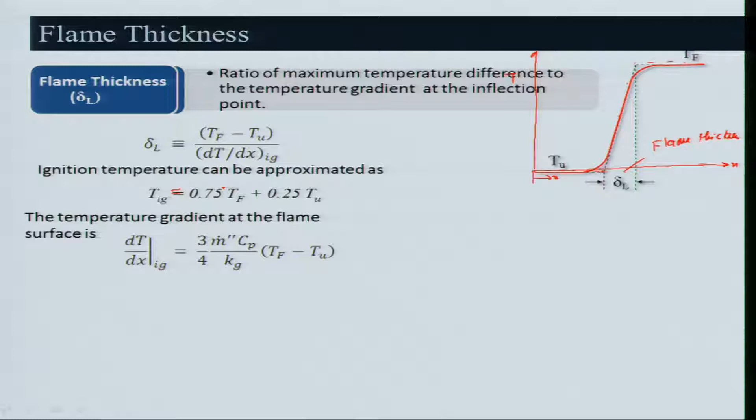The temperature gradient at the flame surface, dT by dx, we have already derived, is equal to 3 by 4, m dot double dash f, f being the bar average, Cp by kg, T_f minus T_u. And in place of T_ig, we have used this terminology.

So what we will do now is substitute over here. If I substitute, what am I getting? I am getting T_f minus T_u divided by 3 by 4, m dot triple dash f, Cp, and kg will go here, and T_f minus T_u, so this cancels out.

So what do I get then? I get delta L is equal to 4 by 3, kg divided by Cp, m dot f triple dash bar. That means this is the average reaction rate in the reaction zone we are considering. It goes on changing, but we take it because we will be using the Arrhenius equation for a global reaction, for a single step chemistry.

So therefore we can get that, and we know that m dot double dash, m dot, is basically rho u S_L. We can find out that delta L is equal to 4 by 3 alpha by S_L.

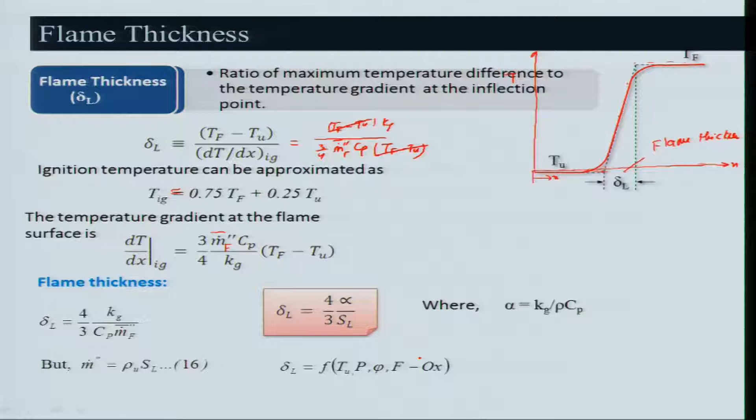That means, what do you expect here? If I say how this flame thickness will be varying with respect to equivalence ratio, I need to look at how the laminar burning velocity is varying with the equivalence ratio. You remember that the laminar burning velocity for a methane-air system or for any hydrocarbon-air system...

This is my phi, phi is basically the equivalence ratio. How will it be? If I take around 1 here, this is the lean side and this is the rich side. It will be something such that around 1.05 there will be peak values.

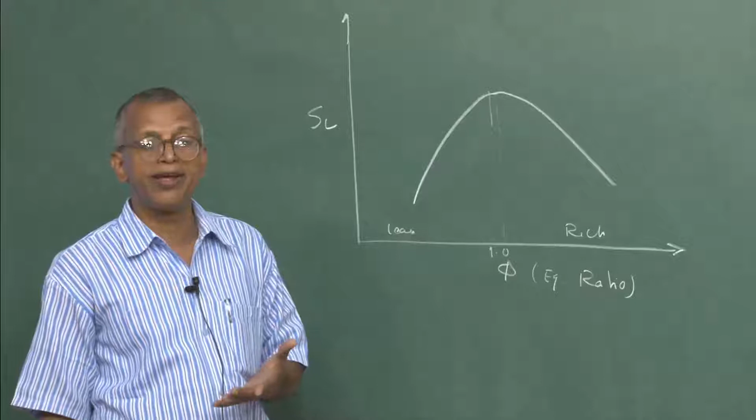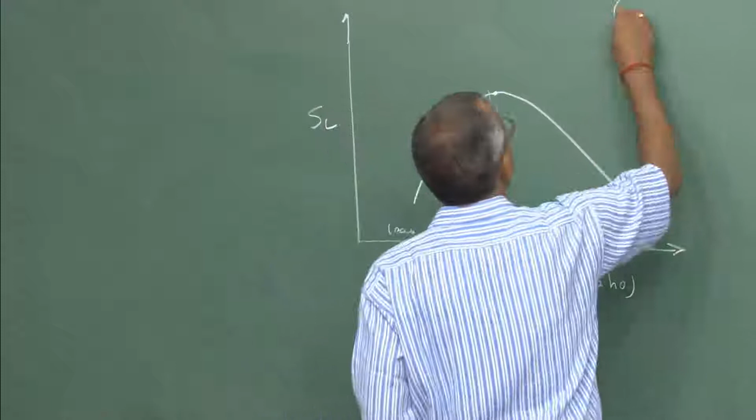Now if I want to draw how this flame thickness will be varying with respect to equivalence ratio: if you look, my burning velocity is very high here, so naturally this delta L is proportional to 1 by S_L, so I will get a minimum value, because the burning velocity is highest there.

So if I keep all the other things the same, inlet temperature and pressure, then naturally it will be roughly constant. Other things may change a little, but it will be proportional to 1 over S_L, so where burning velocity is higher, delta L will be minimum.

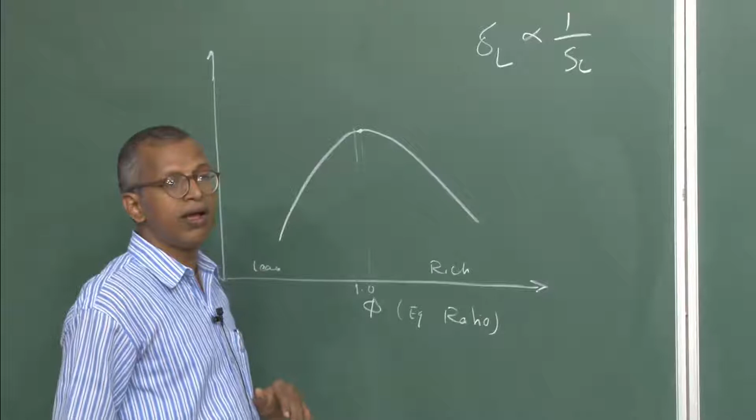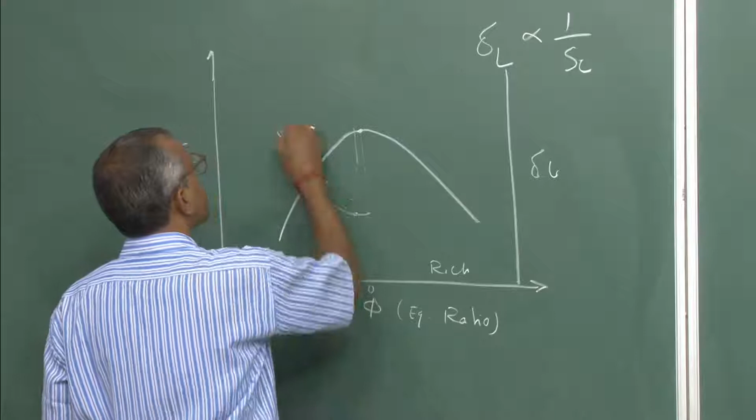So if it is on the lean side, what would it be? If I draw delta L here, my value will be somewhere very low, and on the other side it will be like that. This will be delta L, because my burning velocity is dropping down both on the lean and the rich side. Of course the slope will be different, the rate at which it drops down, but it will be just the opposite, as we will see.

So, having talked about flame thickness, we will be looking at another very important aspect, that is flame extinction.

If you look at why you need to study flame extinction, it's because we know that fire or flame is a very dangerous thing. We have seen houses gutted by fire, and nowadays a lot of buildings catch fire due to negligence. In earlier days in villages, whole villages would be turned into ashes because thatched houses were used.

But the question arises, fire is very important for our life, so how to control it is also important. In engines like rocket engines or gas turbine engines, or any other engines where we generate power or thrust, we always try to control the fire or the flame in it. I am using fire and flame interchangeably here, just for convenience, keep in mind they are not supposed to be the same.

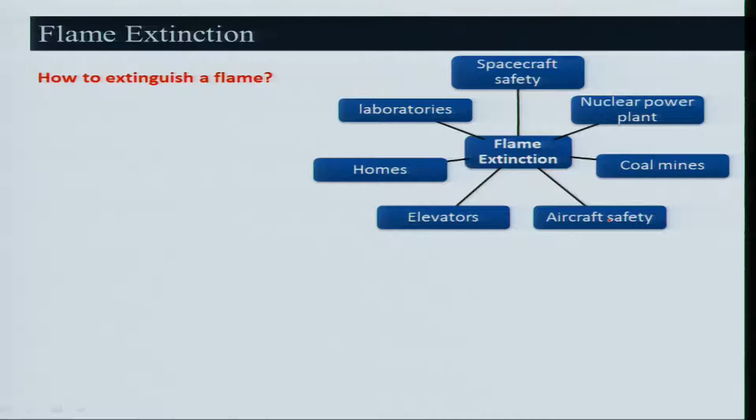What are the ways? We have seen, like a candle flame, whenever the light will go away we generally use a candle flame temporarily. Nowadays emergency systems with battery backup exist, but how do you extinguish a candle flame? Just blow air. What are we really doing by blowing air? How is it being doused or extinguished?

Whenever there's a fire, I don't know whether you people have been involved in extinguishing one or not, because nowadays everyone is self-centered. Earlier days, whenever there was a fire, we would go with people and help them. Today, in cities and even in villages, people are not cooperating, because people are more selfish nowadays. Anyway, let me not get into that.

What do we really do? We just go and pour water, like a bucket of water we used to take in the village, and today you have a hose pipe to put out water. So water we can use to douse a fire, and sometimes we spray water. If water is not there, what could have happened?

So now the question arises, what is really happening inside? Sometimes you might know about the fire extinguisher, using carbon dioxide gas or some kind of nitrogen. What really happens?

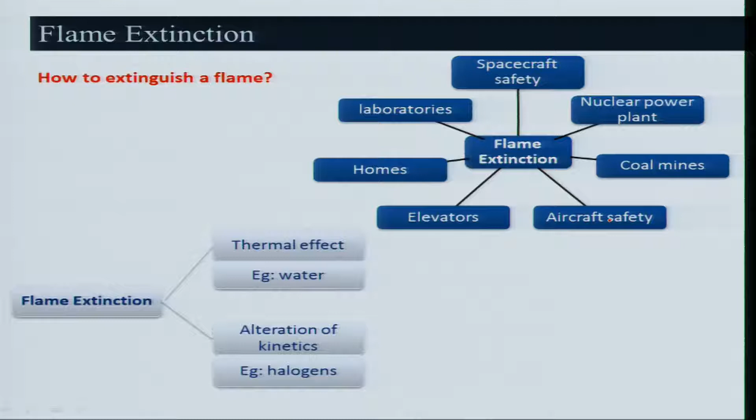In recent days, a lot of things are happening for no reason, very violent kinds of things. So how to do that? This is again, you will have to quench the aspiration or the violent mind of a person. Similarly, the flame is considered as violent, so you need to quench it. What is the way of quenching it? As I told you, it is the energy which will be released that you will have to contain—that is the basic principle. Either you do it by thermal effect or by kinetics, it is the energy that matters altogether. Similarly, when youngsters are becoming violent nowadays across the globe, India is no exception, how to handle them is a very important aspect. That is why I gave a quote like, you need to look at other aspects of life.

So coming back to that, we will talk about how we quench our flame. One way is transferring the heat—if the flame is there, how will we do it? You will have to put water or something.

Suppose there is a tube where the mixtures are there, particularly in the case of a premixed flame. Then what do you have to do? You have to transfer the heat. How can we do that? You can cool it—mixing, or without mixing. That means we can allow the flame to pass through a narrow passage. Then what happens? It will be quenched, or it will be accelerated.

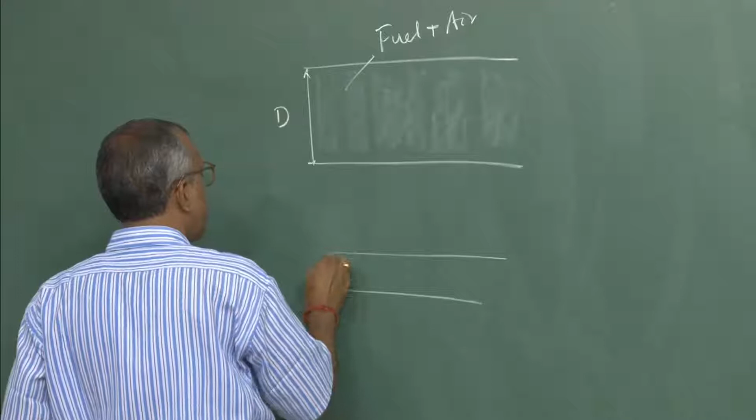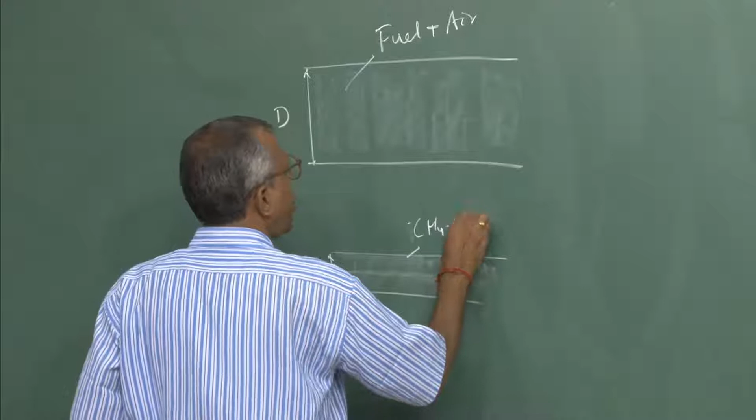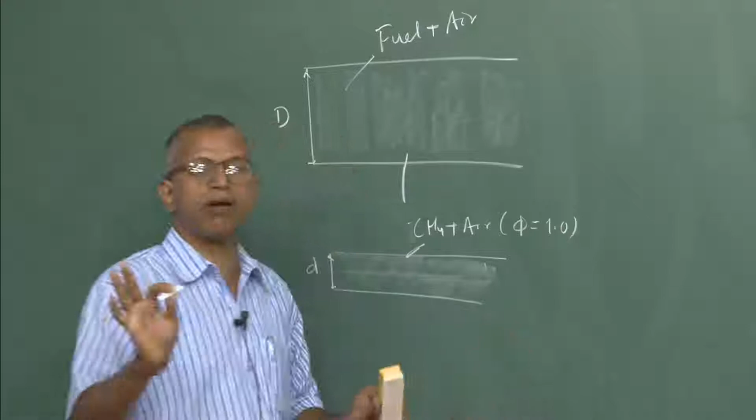If there is a mixture, for example, I am taking a passage like a tube. This is the tube where there is a fuel-air mixture, and there is another tube which is very, very small. Keep in mind this is D, a very big diameter, and this is a very small diameter. This is also mixed with the same fuel-air mixture. If I say this is methane plus air, and this is also methane plus air, both are the same equivalence ratio—let's say phi is equal to 1. Both are the same, and I will ignite here.

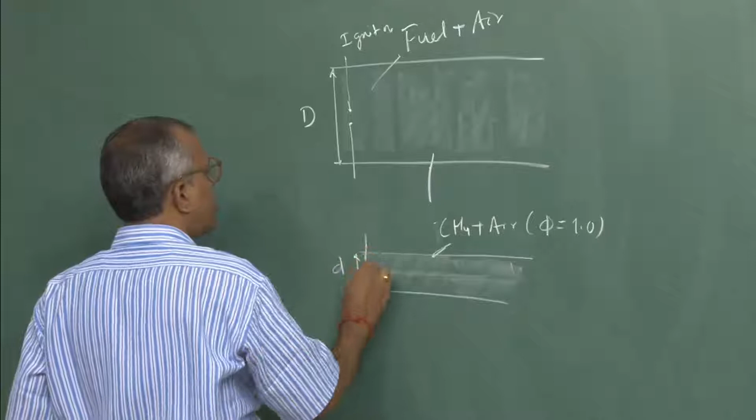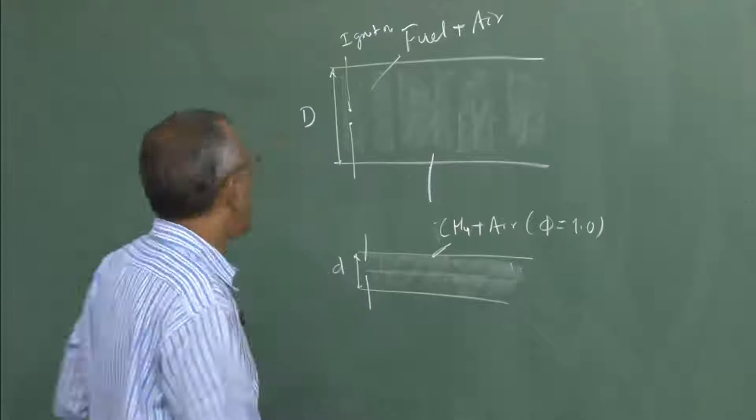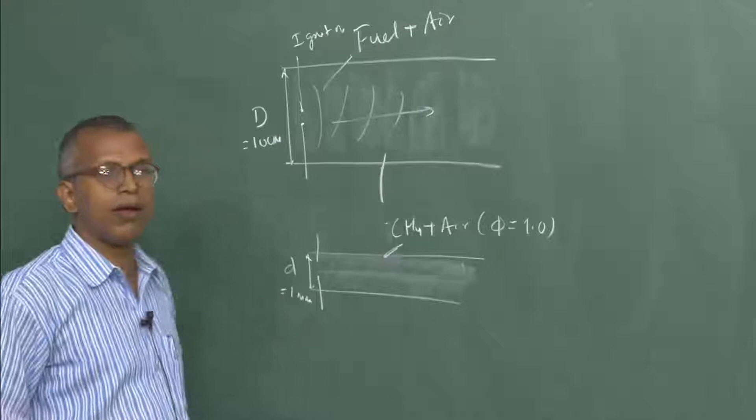This is the ignition source, or a spark I am creating. Similarly, I am creating fire. What will happen? Let us say this is a 5 or 7 centimeter tube, this is a 10 centimeter, and this is 1 mm, one order of magnitude difference. What will happen? Will the flame propagate in this? If I do it with the same amount of ignition energy, same fuel air mixture, what will happen to the flame? Will it propagate?

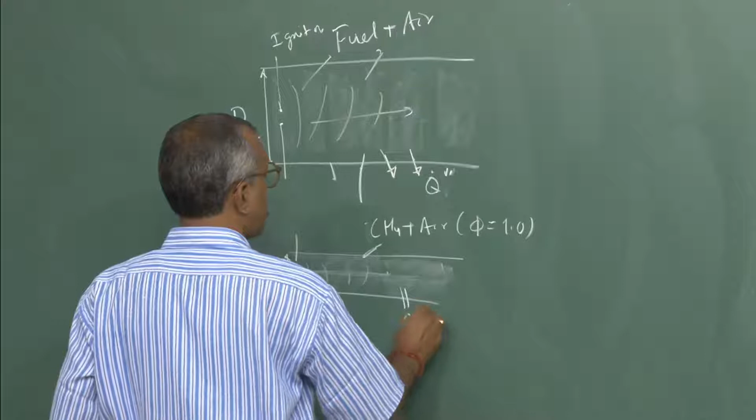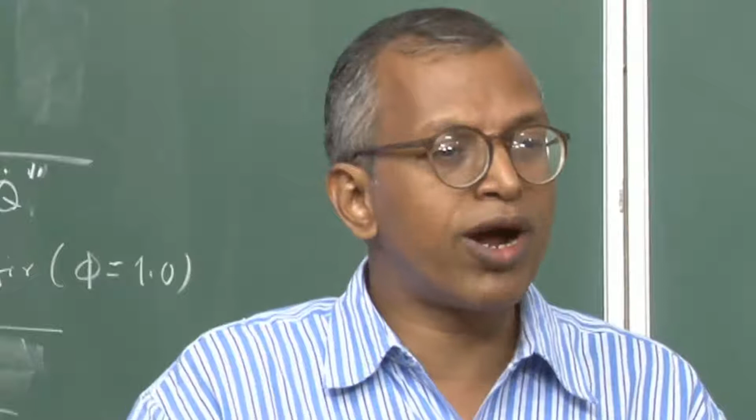Keep in mind that a lot of heat transfer is taking place here, that means heat is going out. This is going out, similarly this is also going out. What will happen in the smaller diameter? Will the flame go? If I make it small, if it is going at 1 mm, if I make it 0.5 mm, will it go? If I make it 0.2 mm or 0.1 mm, I can take another tube of 0.1 mm.

The same thing, mixture CH4 and air, phi equal to 1, this is 0.1 mm.

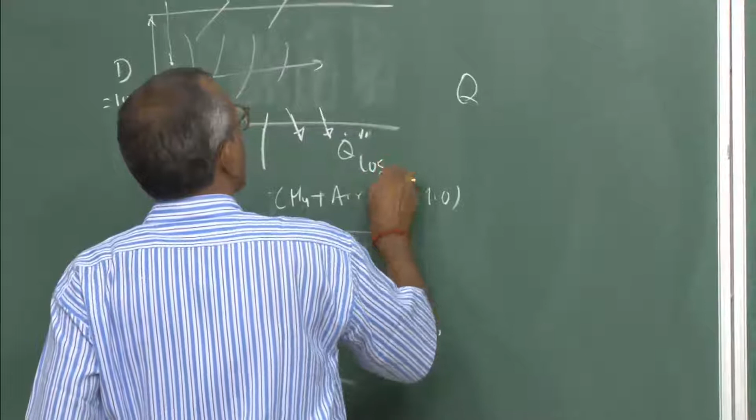You will find there are two things happening: one is heat being generated, because for the same fuel air mixture you are giving ignition energy, and another is heat loss. Heat loss can be several things: conduction, convection, radiation. Let us say total heat loss is whatever is happening. So how does heat loss change along with this, as I look at the losses? It is changing, but how?

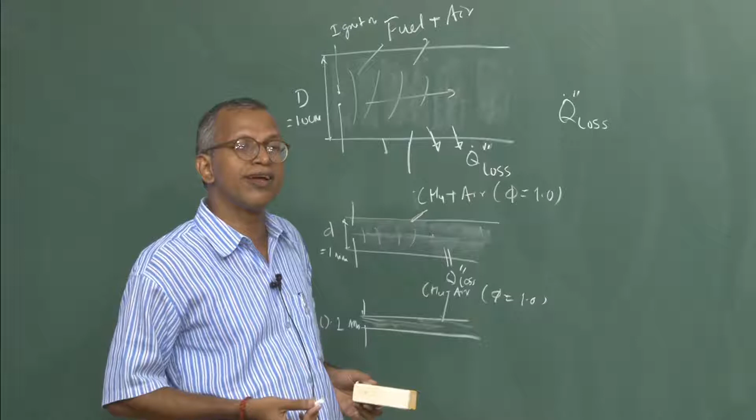Is the same heat loss happening for all the diameters I have taken? What is happening? Is heat loss decreasing as I go along, like it will decrease like this, or will it remain the same, or will it increase? There might be three things: one is heat loss will increase from here to there, another is heat loss from the three cases will be decreasing, that means here it is increasing, here it is decreasing, or it will remain the same, not changing between the three diameters I have considered. What will be happening?

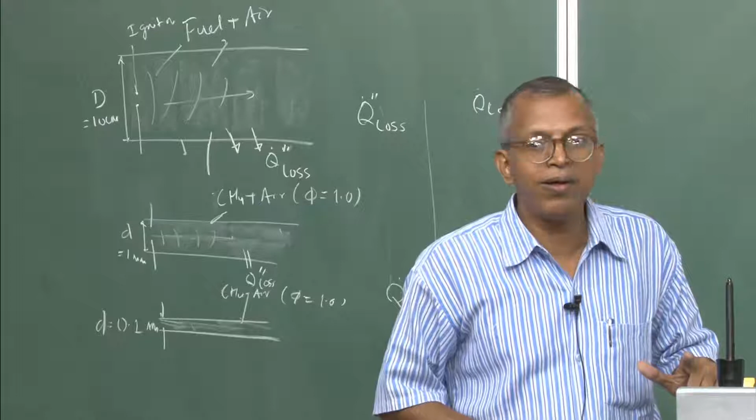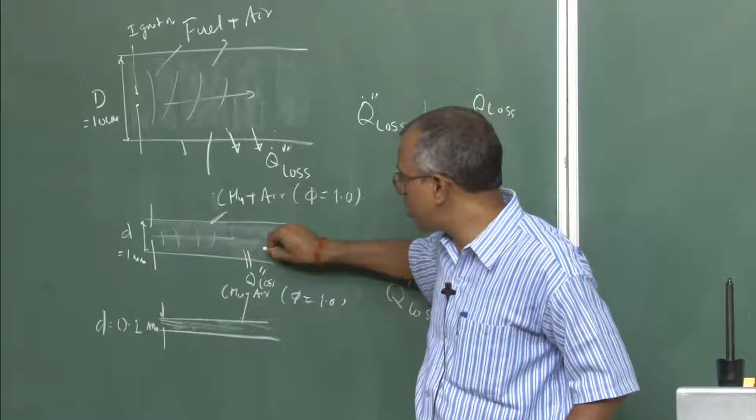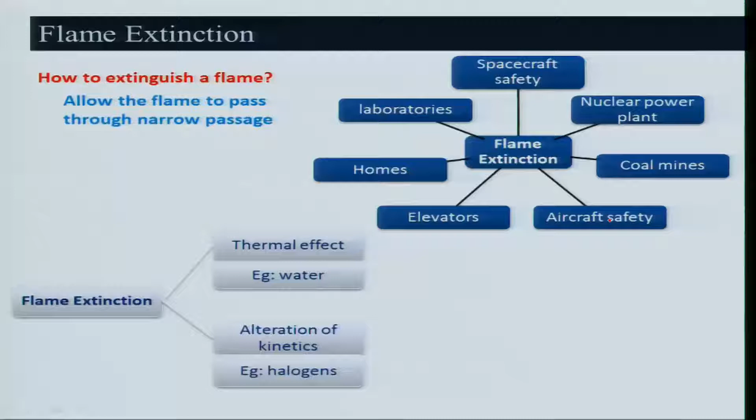Heat loss will increase as you go along, meaning less heat loss from here, more heat loss from here, and the most heat loss at the smallest diameter, because the surface area is increasing as compared to the volume of fuel air mixture being burned, that is very important. This concept was recognized by Humphry Davy long time back, who employed it in devising a mine safety lamp.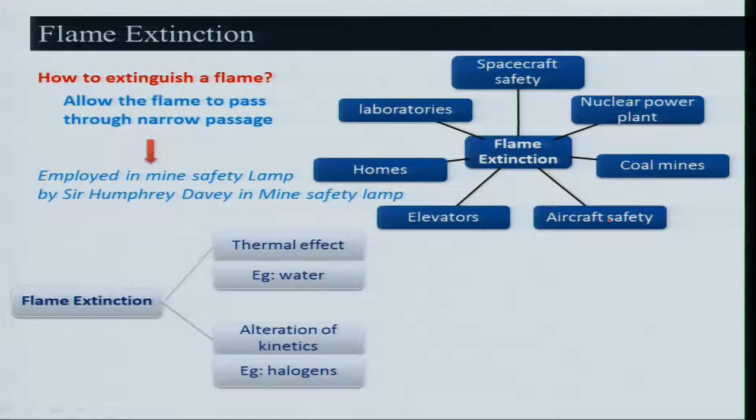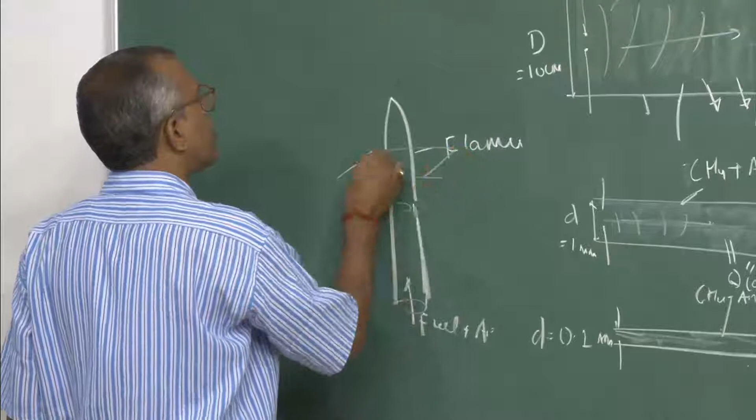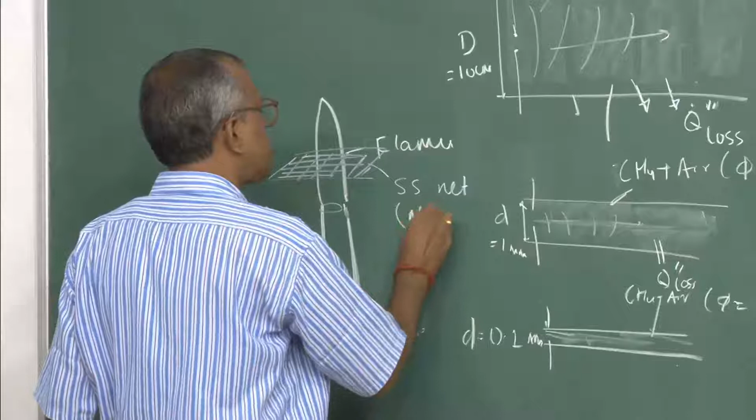Did you observe this in your +2 science experiments? Suppose there is a premix flame, like a Bunsen burner, with fuel plus air mixture, and this is the flame. If I put a net over here, a stainless steel net, a very fine mesh, what will happen to the flame?

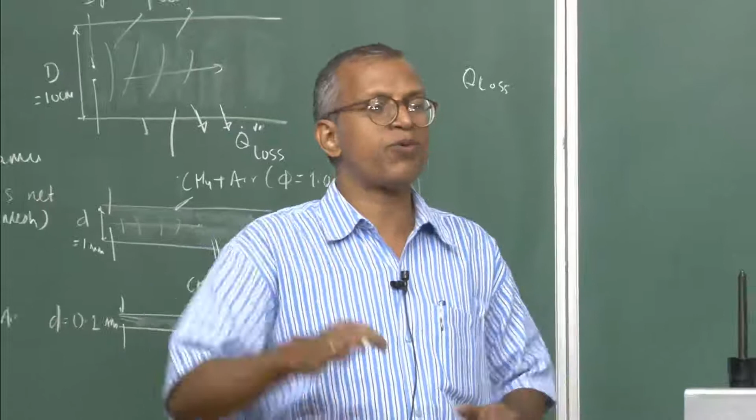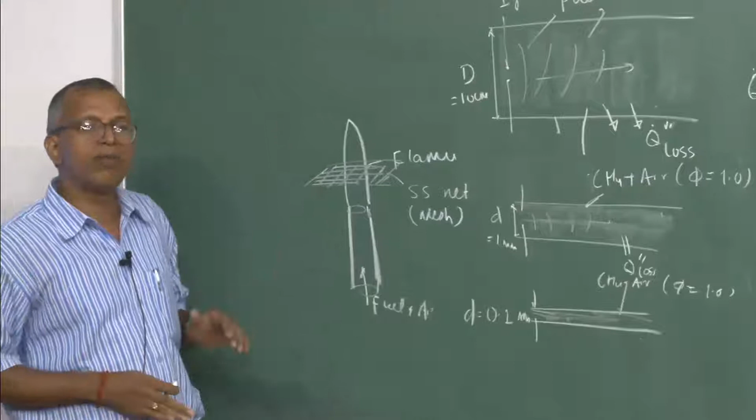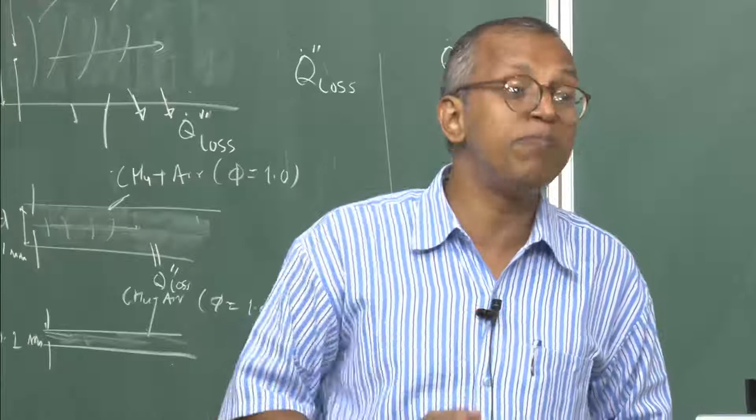If the flame is there and I put this mesh across it, what will happen? It will spread. There will be flame at the bottom and also at the top, isn't it? What did you observe? There won't be any flame at the mesh itself, and as you move this mesh, you can take the flame with you to some extent. The flame will be dangling, and you can make the flame dance with the help of a mesh. This concept was used by Humphrey Davy to contain the flame.

Why is this so? That is because he was dealing with quenching, trying to quench the flame. The flame cannot propagate through the pore holes of the mesh, and we need to look at what flame quenching is. As I told you, whenever heat loss is higher than, or equal to, heat being generated, there will be flame quenching. That means for a flame to propagate, energy released due to chemical reaction must maintain a high temperature, otherwise it cannot. If all the heat being generated is going away due to heat loss, then the temperature cannot pick up naturally, so you cannot sustain the flame.

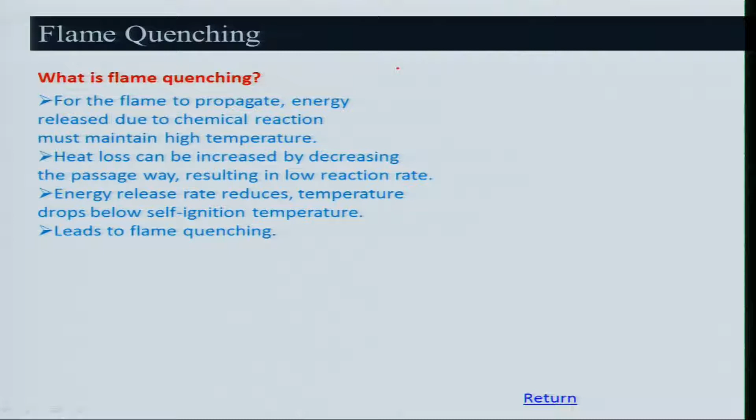Heat loss can be increased by decreasing the passageway, resulting in low reaction rate. As I told you, surface area increases when you decrease the diameter or width of the channel, as compared to the volume amount of heat being generated in a particular volume. So energy release rate reduces, temperature drops below the self ignition temperature, and as a result there is flame quenching. If you look at the whole process, it basically involves heat balance.

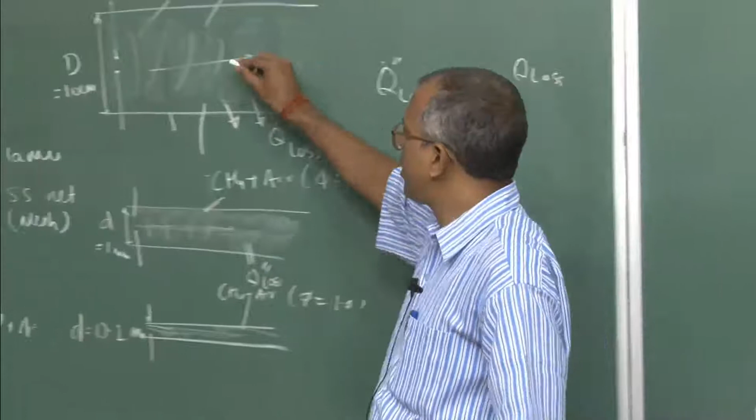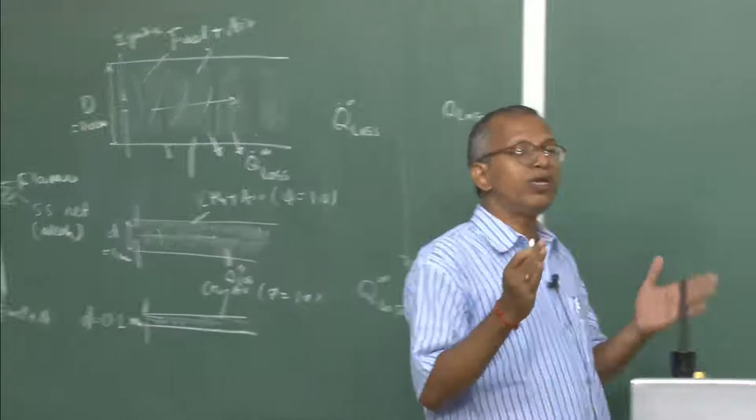So now, what is the quenching diameter? As I told you, I will conduct an experiment in this way. I will take some diameter d and see whether the flame is traveling or not, and I will take the same mixture, go to a smaller diameter, and find out at which diameter the flame is not propagating or not going through. That is known as the quenching diameter. This is the critical diameter of a circular tube below which flame cannot propagate.

And people have conducted experiments also for a channel. This one is a tube. This is a channel, two plates they can take and conduct experiment, and that is also known as flame quenching width or the quenching width kind of thing.

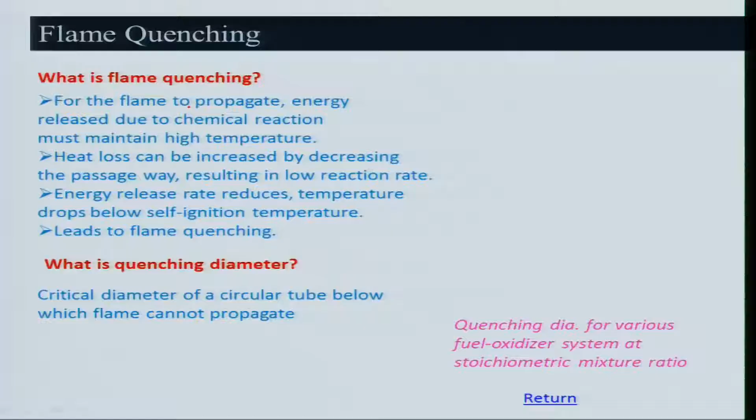So some of the data you can look at, methane air has a 2.5 mm quenching diameter, but if I use methane and oxygen, you will see it has been reduced to 0.3. And similarly, for propane air, acetylene air, the quenching diameter is 0.8 as compared to methane air. Why is it so?

Because the burning velocity is higher, that is 140, whereas here it is 40. If you look at hydrogen air, the burning velocity for the stoichiometric mixture, equivalence ratio equal to 1, is very much higher, and correspondingly the quenching diameter is smaller. And whenever you put oxygen, naturally it will be smaller.

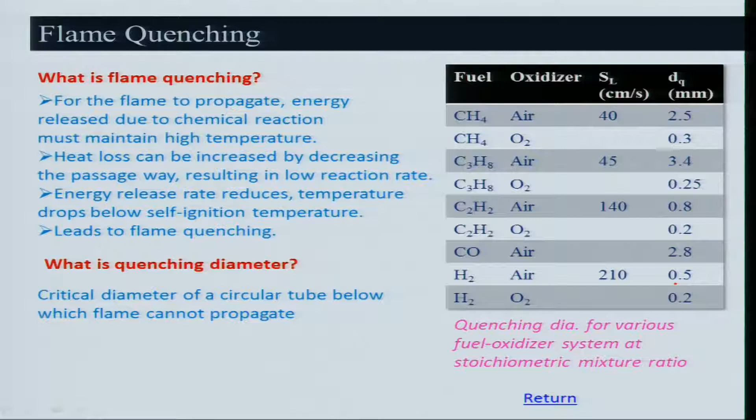So we need to now relate this quenching diameter to the laminar burning velocity. We will do that using a very simplified analysis. What I am doing here: this is basically a tube having diameter dq. I am saying this is the quenching diameter, and this is the flame which is traveling through it with a velocity, the burning velocity SL.

Delta L is the thickness of the flame, meaning the thickness in which all the heat is being released and some conduction is going on. Here we are considering that there is no heat loss due to radiation, and also convection we are not considering. What we are doing is assuming whatever heat is being released is basically going away due to conduction. This is an approximation, keep in mind, and we will be doing some more simplification.

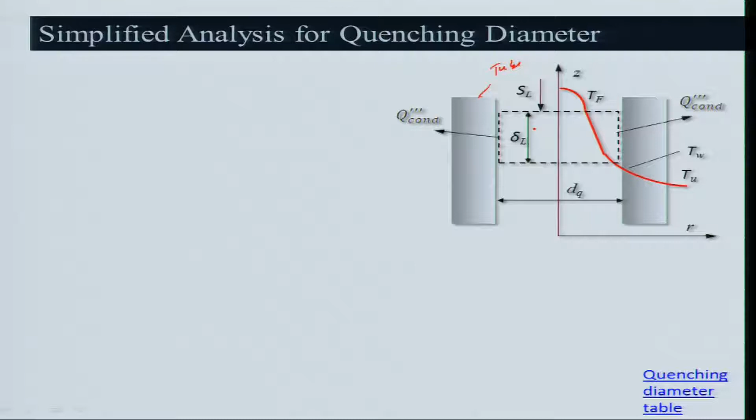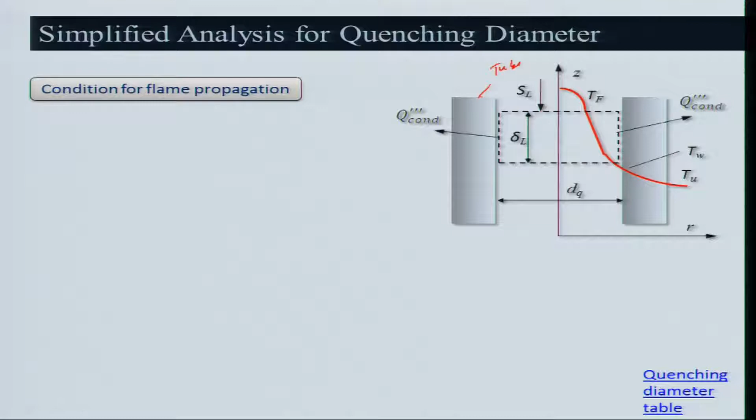That means for this condition the flame can propagate only if the heat released or heat generated due to chemical reaction is greater than the heat loss due to heat transfer. In this analysis we are talking about only heat conduction, but in a complex analysis you need to talk about radiation as well. But that means it will be quenched whenever the heat generated is equal to the heat loss due to conduction. So let us look at the rate of heat generated per unit volume.

That will be what? In this volume it will be Q triple dash equals m dot f times delta H_C, the heat of combustion. This fuel is being consumed and this heat is being released, so this is the amount of heat. Of course, keep in mind that here we are assuming all the fuel is being burned and releasing its heat. In a real situation it will not be so; this is an idealization.

So heat generated in the volume, which is per unit volume, will be this term multiplied by pi by 4 times dq squared. This is like the cross sectional area. If you look at it, it will be like this, and this is delta L, and this diameter is basically dq. So it's a cylindrical kind of thing: pi by 4 d squared times delta L.

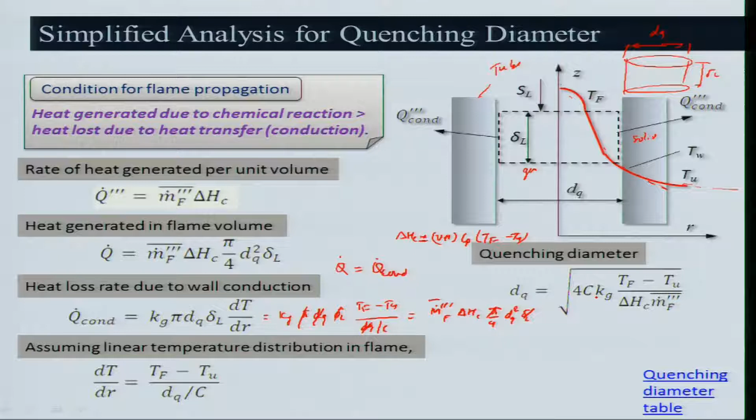This is an approximation. So we can use that, and 1 over m dot F we can express as burning velocity - you can look at those expressions. When you do that, after simplification I will get dq is equal to root over 8C times delta L.

Once I get the laminar burning velocity, I can put this in terms of flame thickness. So this dq is basically proportional to the flame thickness, and it is a constant - that means dq will be higher than the flame thickness.

Of course, we have seen the quenching diameter table - I am not going to talk about that, but let us see how it is varying. Keep in mind that delta L is inversely proportional to the burning velocity, related by 4/3 alpha by SL. That means dq, or quenching diameter, is a function of equivalence ratio, and it can also depend on inlet temperature, pressure, and the type of fuel-oxidizer system.

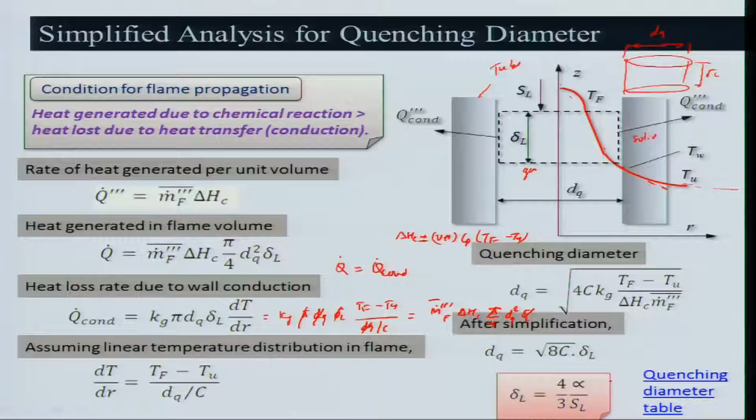By using a very simple analysis, which is quite simple, we can show the trend, and the trend is quite good. It can give you the overall feature and it can replicate the experimental data, it is replicating the trend. And you can also use it as a design tool.

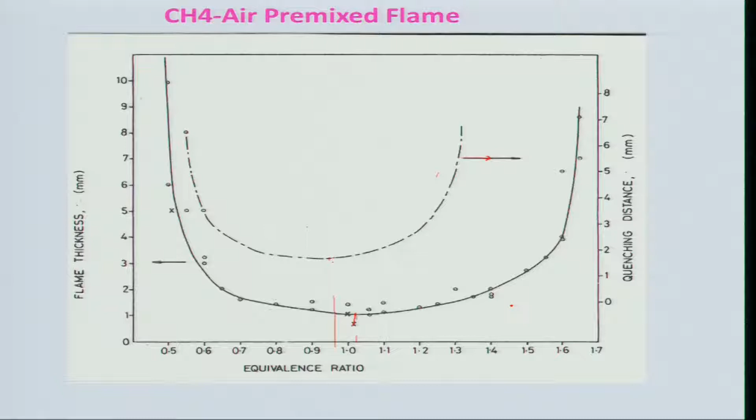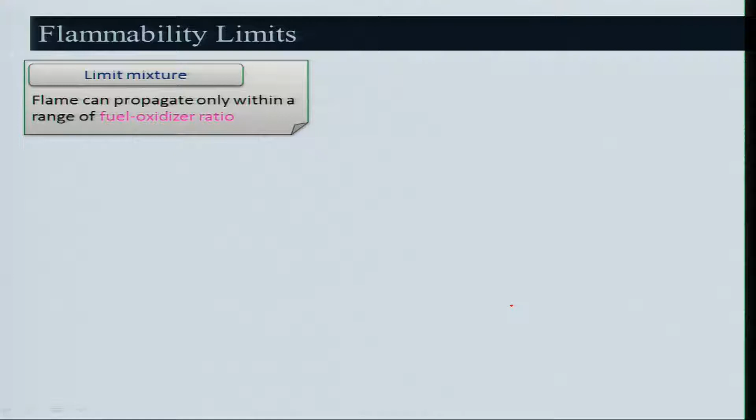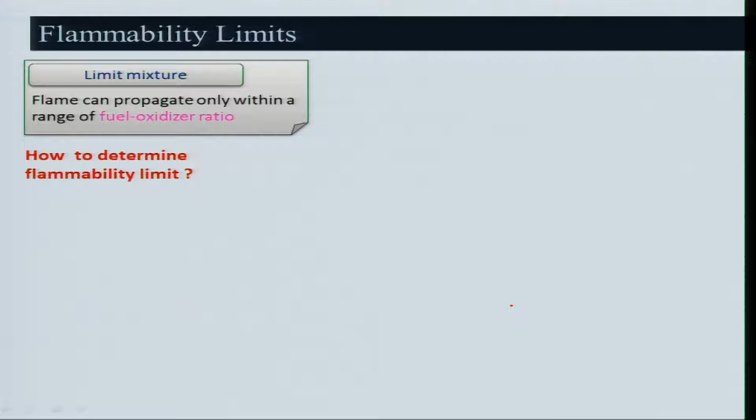Now, if you look at limit mixtures, we will talk about another concept known as flammability limit mixtures. A flame can propagate only within the range of fuel and oxidizer ratio, and it cannot propagate beyond a certain limit, both on the lean and rich side. The question arises how to determine the flammability limit, and this is very important from the safety point of view as well. You should not go on trying to burn some mixture which cannot sustain a flame. This flammability limit is related to something, and we will see that.

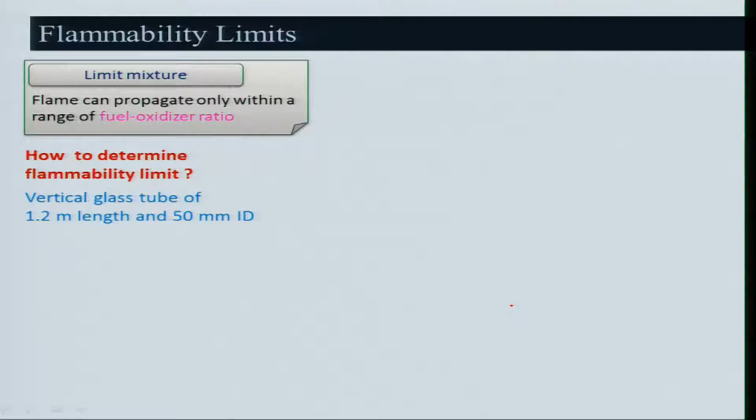There are several ways of doing it, but the most important and commonly used method is a vertical glass tube, particularly for atmospheric pressure conditions, with a length of 1.2 meters and 50 mm inner diameter. Why not a smaller diameter? Why not a bigger diameter? Why 50 alone?

If you look at a typical experimental setup, it is a tube filled with the fuel-air mixture or fuel-oxidizer mixture. Air is of course one of the oxidizers. You ignite at the bottom and let the flame propagate, and see how far it is moving. Generally it should move half of the length, that is 1.2 meters, as per the American standard, like the American Petroleum standard kind of thing they use.

It should move half of the length; only then can you say it is flammable. Otherwise, if it is initiated but does not move half of the portion, then we call it inflammable, or not flammable. So that is the limit.

It can have both what you call a lean limit and a rich limit. If you look here, the burning velocity shown with the fuel-air mixture, there will be a limit beyond which the flame cannot move, meaning the flame will not have any tangible burning velocity because it will not really move. Now the question arises why this happens on both the lean and rich side, why the flame is getting quenched.

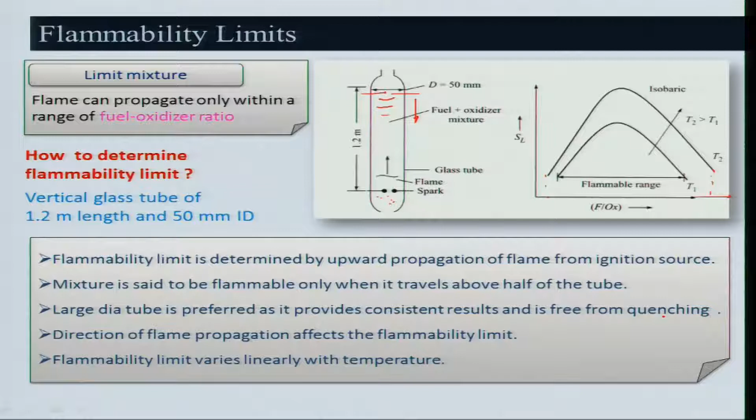Flammability limit varies linearly with temperature. So as I told you, it is dependent on temperature, and it is also dependent on pressure limits. If you look at pressure, I have shown this in terms of equivalence ratio.

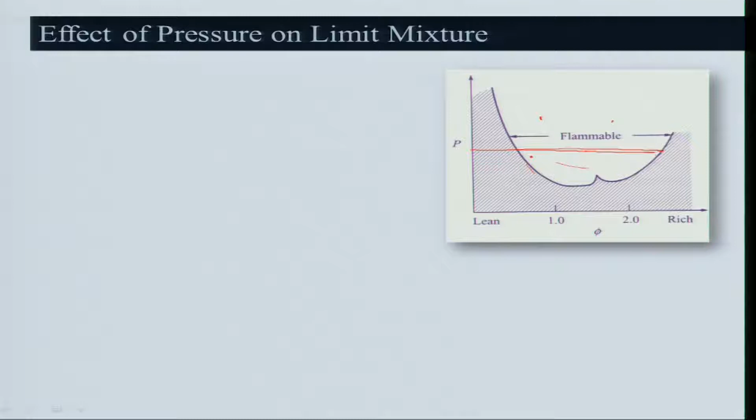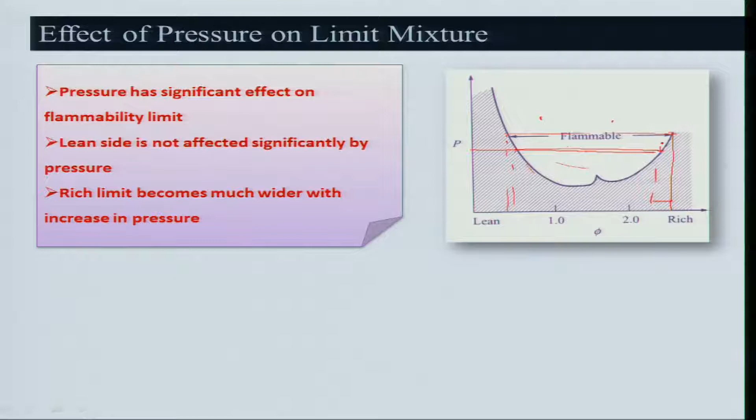These are flammable mixtures inside here, but outside it is non-flammable. On the lean side you can see one kind of behavior, whereas if I look at this pressure, the slope is a little shallow here and a little steeper here. So pressure has a significant effect on the flammability limit — the lean side is not affected significantly by pressure, whereas the rich limit becomes wider. If I go to another pressure, on the lean side there isn't much change, but on the rich side there is a lot more change. So that means the rich limit becomes much wider than the lean side.

Of course, CO has a very wide flammability limit, but if you go for hydrogen-air, the flammability limit is quite wide compared to hydrocarbons — 4% to 74.2% of fuel under atmospheric conditions. This is all under atmospheric conditions. So therefore, whenever you are handling hydrogen, one has to worry about it because it has a wider range of flammability from the safety point of view.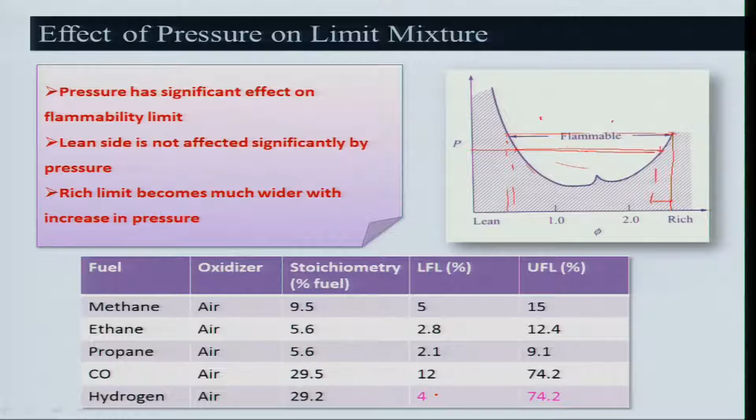So there is another concept I will look at today, that is ignition. What do you mean by ignition? Ignition is when the rate of heat liberation near the ignition zone must be greater than the heat lost by conduction. That means if I am giving some amount of ignition energy, and whatever heat is being lost, then naturally my mixture cannot really reach a self-ignition temperature to have combustion. So therefore one cannot have ignition at all, even if the fuel-air mixture is within the flammability limits.

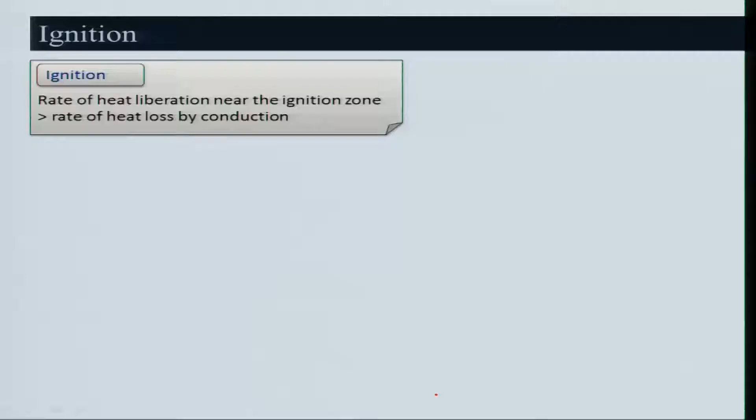That means, what is the minimum ignition energy one can think of? One can think of the energy generated in the flame — the ignition energy must be equal to or greater than the heat loss by conduction. So now what we will do is look at the energy generated in the flame, which equals sensible enthalpy into mass. For that, we will use the same idea we used for discussing quenching diameter — we look at the diameter where the flame is present and traveling, having a thickness of delta L, and it is dq.

Of course, I need to have ignition energy beyond the quenching distance. If I give more than that, then my flame can propagate and I can initiate ignition.

So, let us look at, we will be doing again some heat balance, how much heat is being generated, how much heat is going away, so that I can have a sustained flame for the ignition to occur.

If you look at energy generated in the flame, it will be basically sensible enthalpy, Cp times Tf minus Tu, because I am assuming this is Tf and the mixture which is coming is basically Tu. If flame is traveling here, the mixture will be here, which is at Tu.

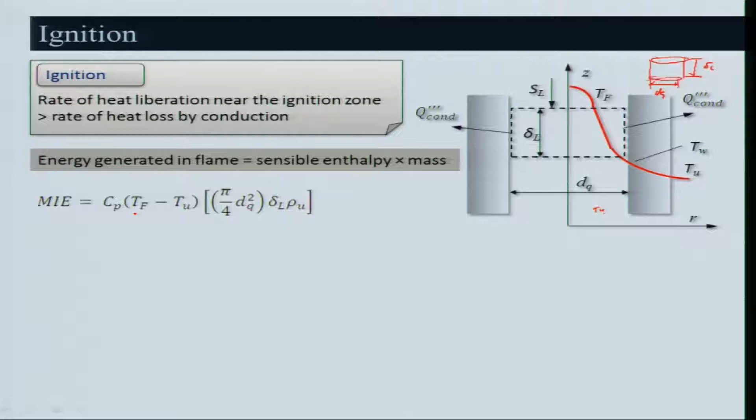This amount of energy is nothing but your minimum ignition energy. This has to be given so that it can attain the flame temperature. Once it attains flame temperature, it will propagate, there is nothing more. So that is the minimum ignition energy.

So substituting the quenching diameter value in this expression, I can get 2 pi c rho u Cp Tf minus Tu delta L cube, because this dq I can use whatever I have used for dq, which is nothing but root over 8 c delta L.

dq is equal to root over 8 c delta L, we will put those values, and we know that delta L is nothing but 4 by 3 alpha by SL. So you will get MI when you substitute these values: alpha square by SL cube, Tf minus Tu, and Kg.

So if you look at the dependence on pressure in this expression, alpha is nothing but Kg by rho u Cp, and Kg and Cp do not change with respect to pressure, but rho u will be changing. So MI will be inversely proportional to rho u square, SL cube, and pressure to the power minus of 3n by 2 minus 1, because we have seen that SL depends on n, the order of reaction.

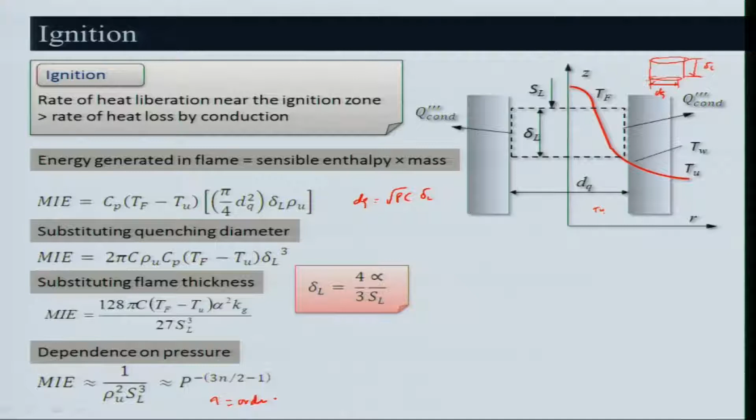So if you find out that minimum ignition energy is dependent on pressure, you can look at some of the things here, the minimum ignition energy for methane air, these are all for stoichiometric mixtures, you can see some numbers, it is of the order of millijoules, and these are from the calculation one can get.

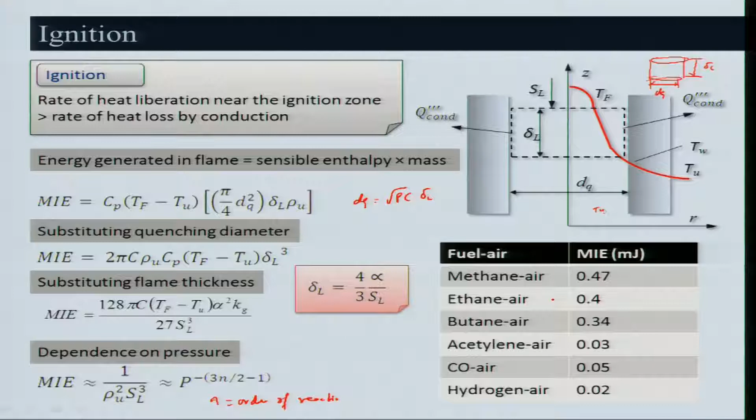So let us now dwell a little bit on how it is dependent on the pressure. We have already seen that if order of reaction is 2, what is happening here? It will be something like 3 minus 1, it will come out to be 2, kind of thing.

So if you look at it, if order of reaction is 2, minimum ignition energy is proportional to P to the minus 2, a very strong dependence on pressure.

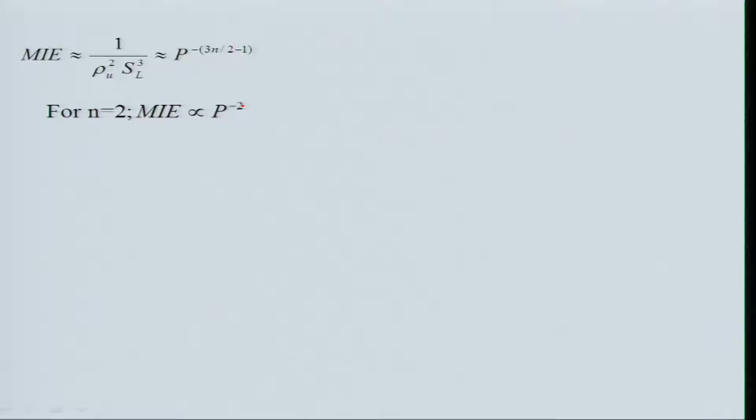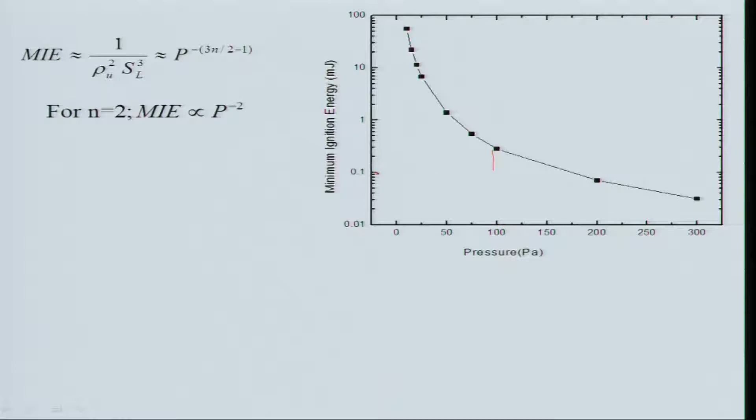If you plot this minimum ignition energy with respect to pressure, you will find that around 100 pascal pressure, some amount of energy is needed, but if the pressure decreases, the ignition energy becomes very, very high. Because it goes asymptotically, almost vertical, the slope is very high. And at higher pressure, if I go from 100 to 200, there is not much difference, this difference is very, very small.

So the question is, can you use the same ignition energy for flow conditions? But before that, I want to ask you, we will be facing a lot of problems in the gas turbine engine, particularly at higher altitude where pressure is low. So can you use this same ignition energy?

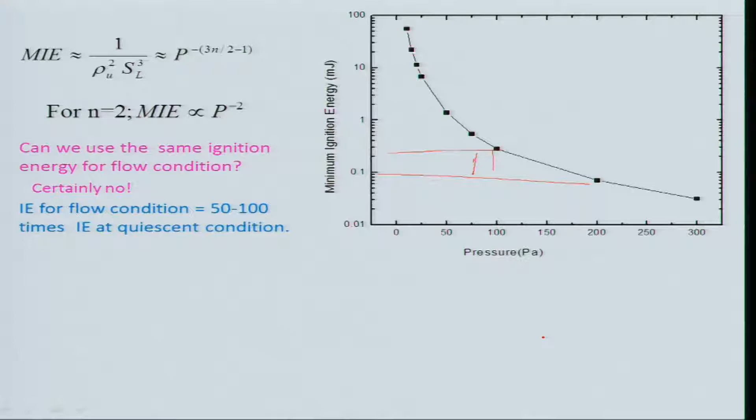Certainly no. For the flow condition, we need to use 50 to 100 times that of the ignition energy in quiescent atmosphere, because in a flow condition, heat losses will be there by convection, which you have not considered, and in quiescent atmosphere you do not consider that.

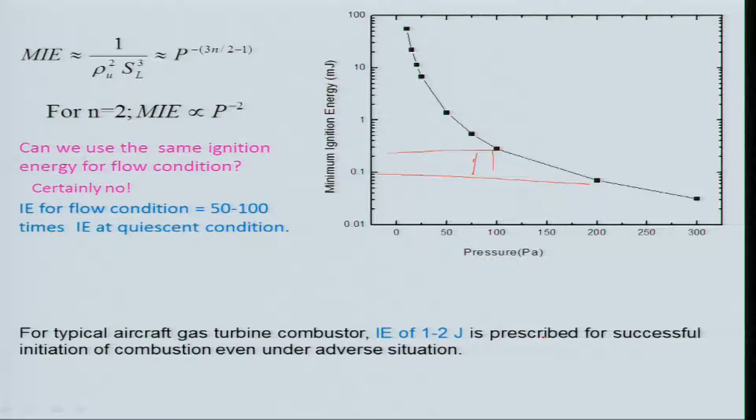So generally for a typical gas turbine combustor, ignition energy of 1 to 2 joules is prescribed for successful initiation of combustion, even under adverse situations. We will be looking at some of these things when we discuss gas turbine combustors. Okay, fine.